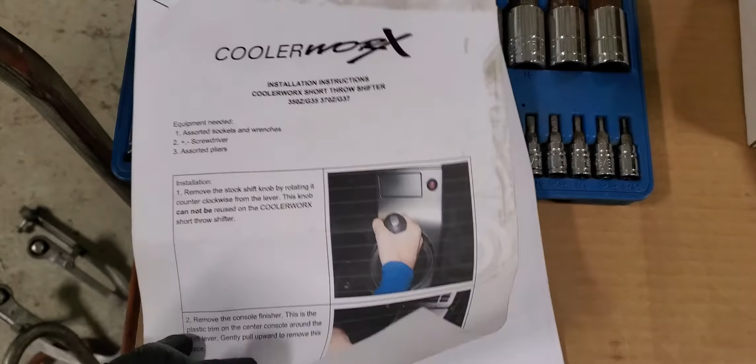So we got some instructions, pardon me stepping on them when they were in the car. I kind of explain things more for a mechanic than just a regular consumer.

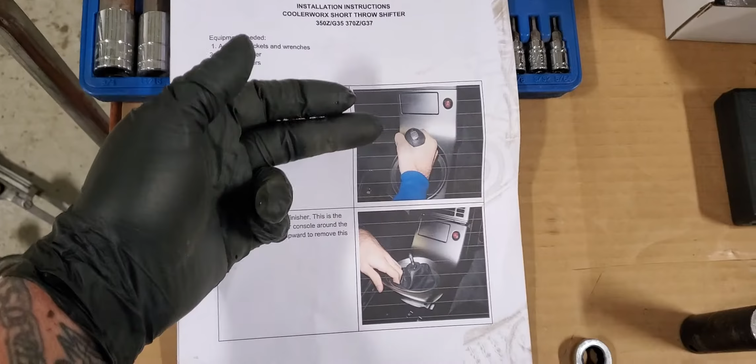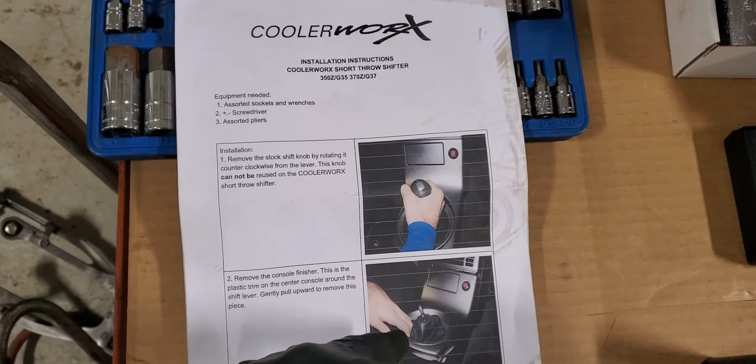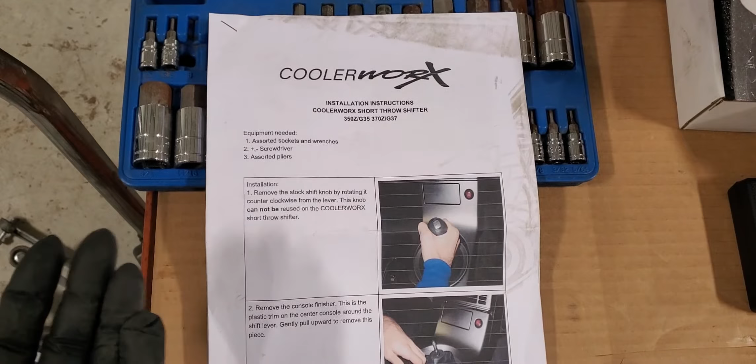So for my mechanics, it says to twist the shift knob, but I wouldn't even worry about all that. You just want to go ahead and disconnect the console retainer that holds the shift boot in, and go up underneath it. Go ahead and pull that 12, pull the whole thing out. You don't need the spring, you don't need the guide collar for the shifter, you don't need any of those components. So go ahead and just pull that whole unit out. Don't even waste your time with that.

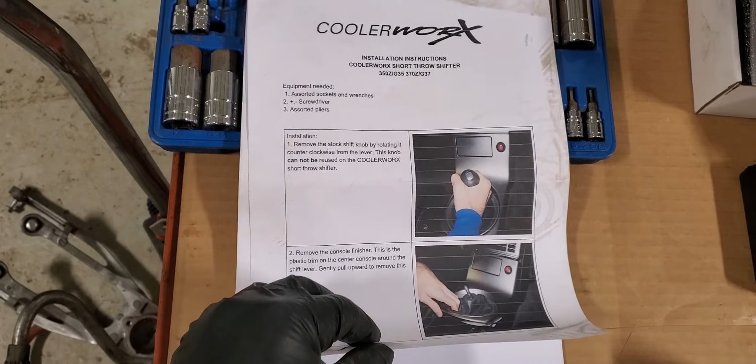I've attempted to do this many times. You just end up goring up your shifter. You're going to be really sad because they put a lot of thread sealant on it from the factory.

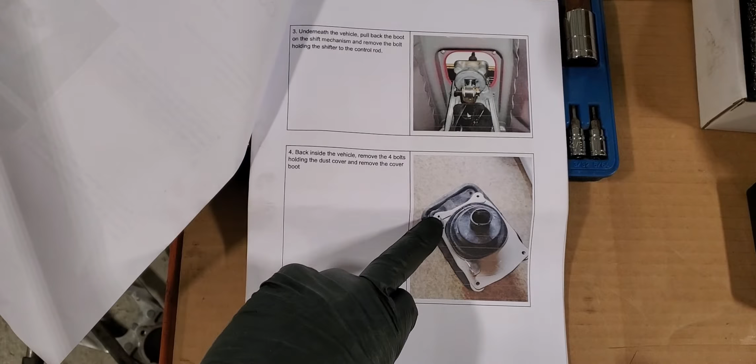Essentially when you pop off that first cover, then it'll expose your 4 10 millimeters. Go ahead and pull those things out. There's your 12 millimeter, go ahead and pull that out. You don't need it. Now see how that collar guide, pull that out.

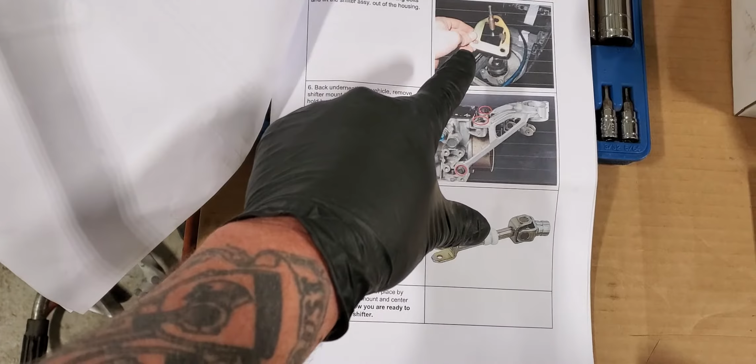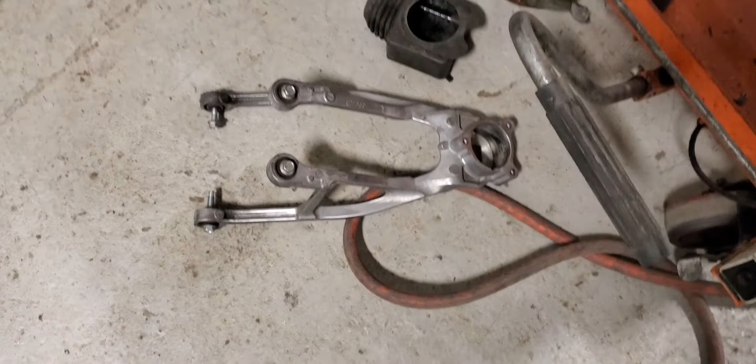Okay, so then you'll notice on the back of the transmission, I know it sounds crazy, but you're not going to need this entire unit. I've got one sitting on the ground right there. You also don't need your shift boot, okay, or your linkage dust cover, so to speak. 4 12 millimeters, 2 on the top, 2 on the side.

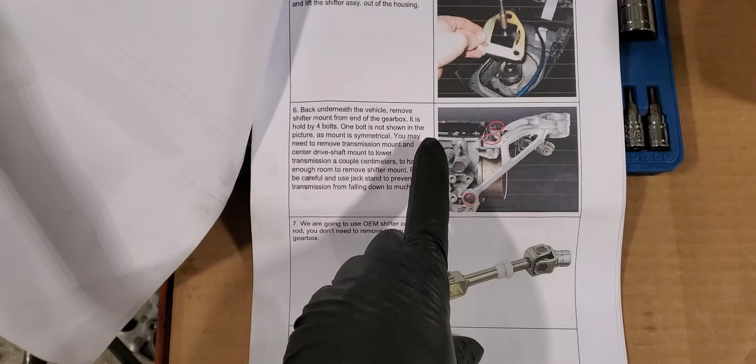Here's my tool selection. I run a 12 millimeter like that. Now, what I also did was I ran my 1/2-inch drive impact gun with a 14 millimeter socket.

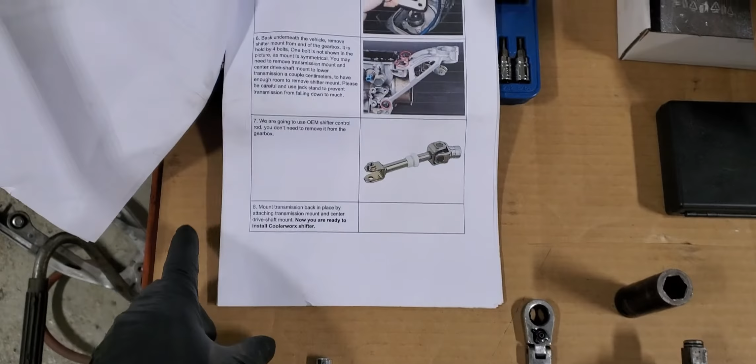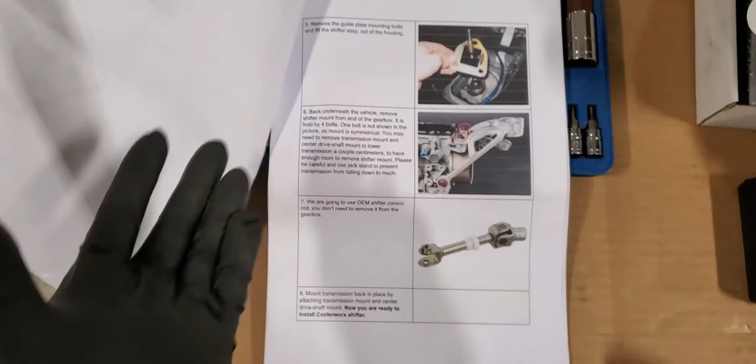I went ahead and I dropped the transmission cross member. It'll make it a hell of a lot easier to put that transmission back in place. You want to drop that transmission back so that you can access the 2 bolts on the top. So that's essentially why in the instructions it says to do so.

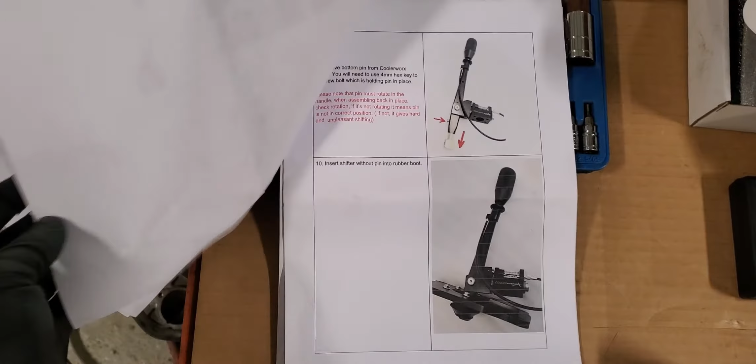So essentially your fork selector rod, shift rod should look like that. No dust cover. All right, so now you can see that this part of the linkage rod right here that connects to the actual transmission linkage, that it's got a 4 millimeter Allen head right there.

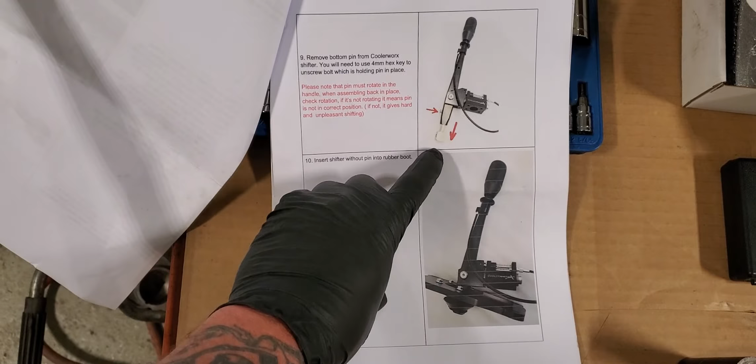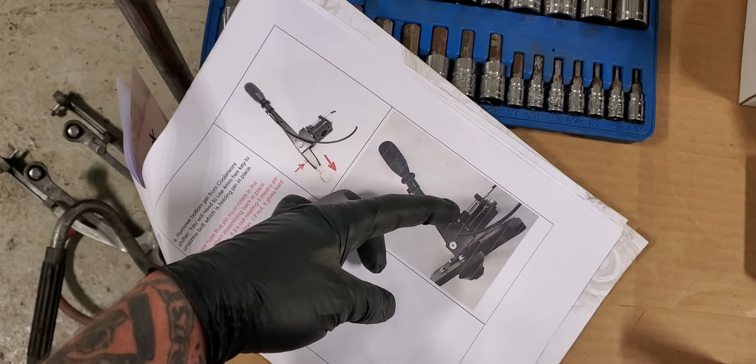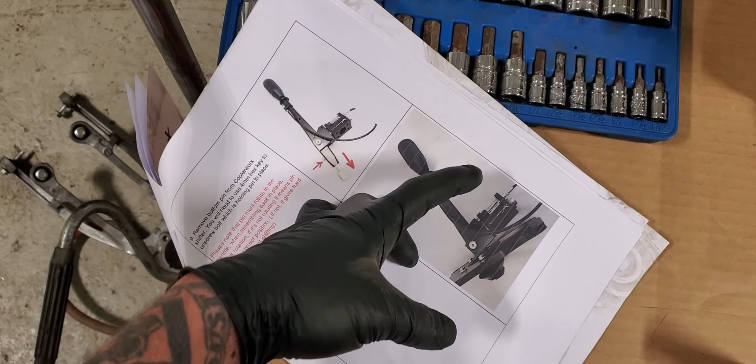You need to loosen that thing and back it up because you're going to go ahead and slide out and remove that shift linkage bar. The reason you're doing that is because you're going to install it on its base plate like this. Over here, I'm almost certain, if I remember correctly, it's 4 3 millimeter bolts that hold this unit on, or it also may be a 4 millimeter. I can't remember, but essentially you're going to mount that to the base plate, and then you're going to insert your shift linkage rod from the bottom through the boot.

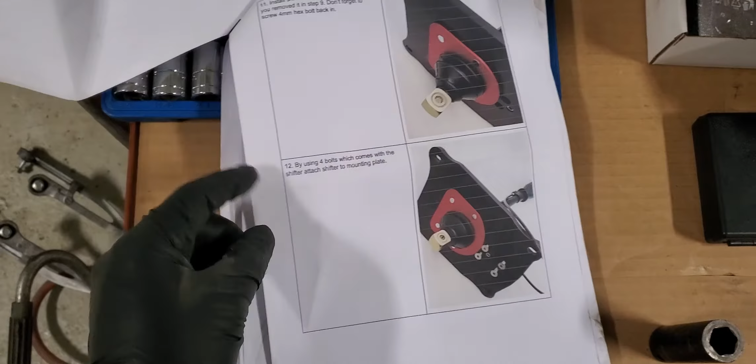Okay, now when you get it all installed, you want to go ahead and still leave that 4 millimeter Allen head loose. So you can see they've inserted the rod. The bolt is still loose. I can't remember if that's, I believe it's actually 4 millimeter. So that's 4 millimeter bolts, recessed, countersunk, that are going to mount that body of that shifter.

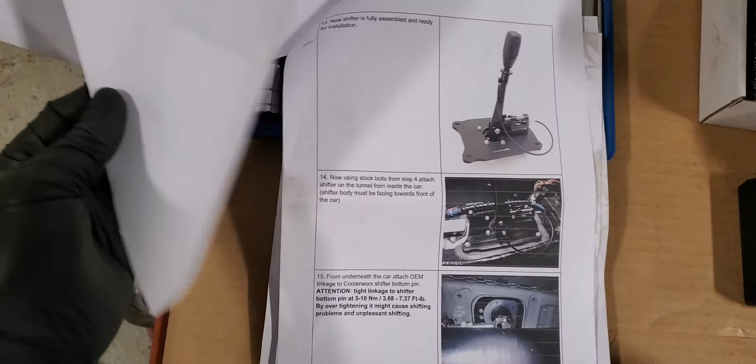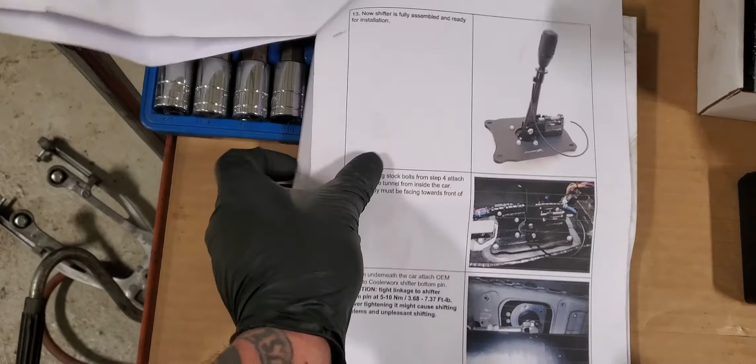All right, so then you can see the shifter installed. 4 10 millimeter bolts hold it and retain it. You'll see my unit, I'm running 5 millimeter Allen head because I want to make it pretty. So you can see up underneath there, the underside image, that there is no dust cover, there is nothing, okay?

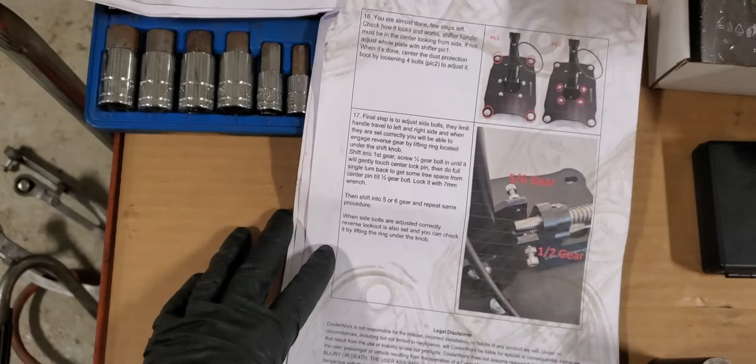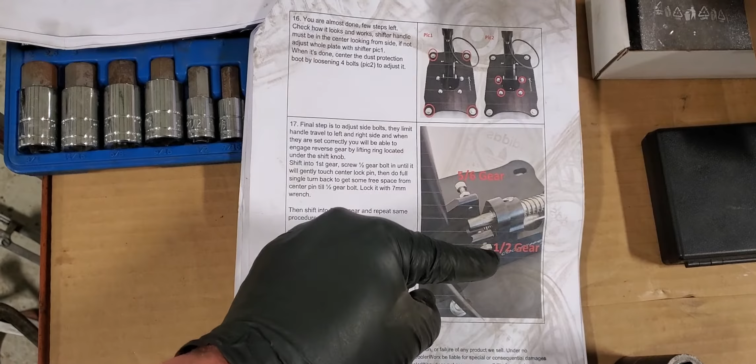When you're attempting to set up your shifter for the correct amount of play, put it into first or second gear and make an adjustment over here. Essentially you want this Allen head to touch that, then back off about a full thread, which is pretty good and pretty loose. A 7 millimeter nut locks it, and I think those are also 3 millimeter.

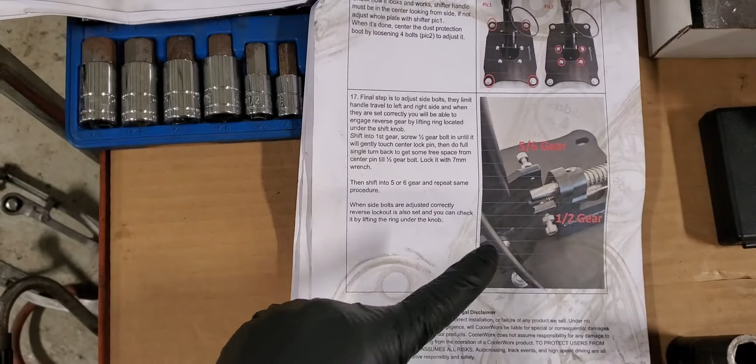And that's essentially all you need to know. Now we're going to go over to the shifter. Let me get a flashlight.

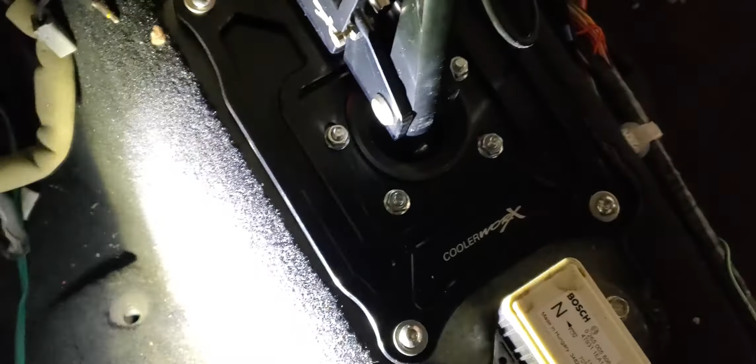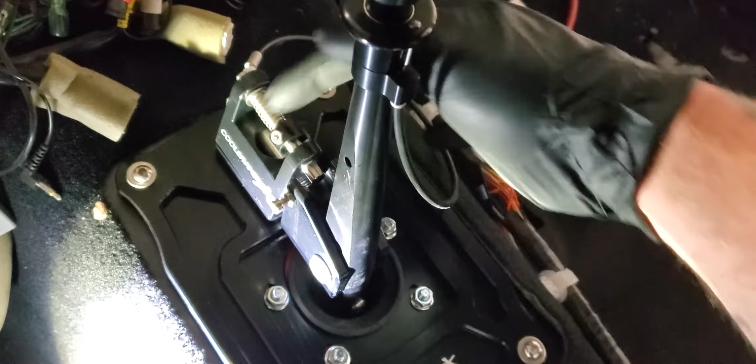So now this is more of my review on the shifter. If you have a problem with your dust cover, which I may make a minor adjustment to mine, you can see the exposed anodized red billet body, and my dust cover is not quite centered. You can make those adjustments via these four 10 millimeter nuts, and you can kind of sit there and play with it. The first, second, fifth, sixth adjustments are right here.

So this is more of my review on the shifter itself and my contention about the quality, okay? Fitment is very precise, very nice, very clean. I like their finish on all their parts, I like their anodizing. It all looks good.

Now what this shifter will remind you of is kind of like a newer ZL1, like a TR6060 transmission. It's super tight, super precise, but the throw isn't too short. It doesn't remind you of an S2000, you know what I mean? It's not like an AP1, it's more like a ZL1, something like that, where you have an adequate amount of throw distance, and also shift fork selection is super precise, so you can speed shift, full throttle shift with this guy.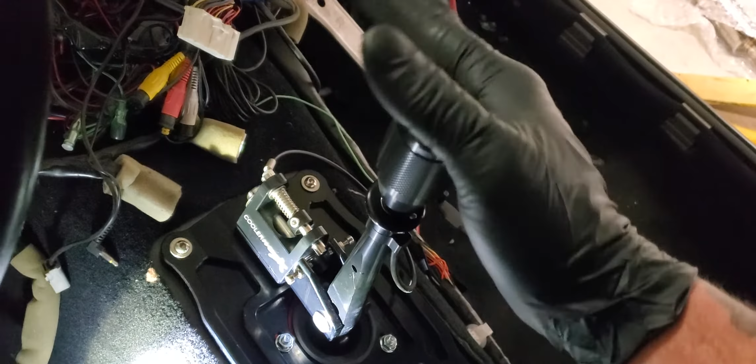So first gear, second, third, fourth. Hold on - first, second, third, fourth, fifth, sixth. And then you can easily stick it into reverse. Mind you, I have a dry box right here, so shift fork selection is not super perfect, but essentially what you get is a CD009 that will act like a T56, but a nice T56. So I'm pretty impressed with this unit. Let's reverse - you just gotta pull up on that collar right there, and I think it's a nice piece, man.

Honestly, I think a lot of the guys that mess up their gearboxes with Z34s, if they were to have this shifter, I almost don't think you can miss shift. Mind you, I have a dry box and I'm sitting in the car - I don't have seats, so I'm just crouched in there. But when you're sitting in the driver's seat with a wet gearbox, man, this thing is butter smooth.

I've messed with these on a few other cars. This is the first one I've installed, but I've definitely seen them in cars because I work on Z34s and R35s all day. I was always happy loading them on the dyno, and that's always kind of the breaking point of a shift selector - how easy is it for me to ramp this car up and roll it onto the dyno.

So yeah, I like it. I think it's a cool piece and a worthwhile investment. Seems like $525 to $600 plus shipping is kind of the going range for these things if you can get a hold of one. So that's my review on the Cosmeworx 370Z shifter.